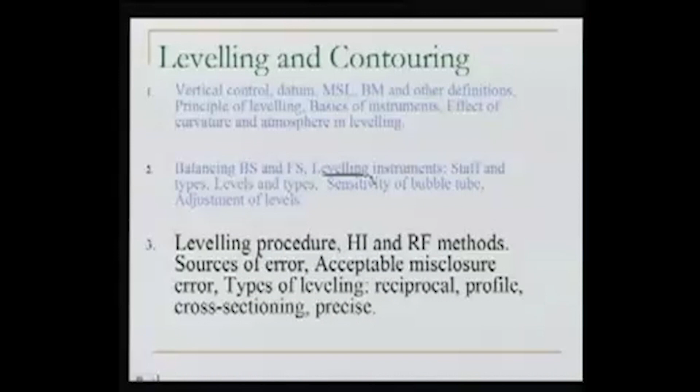What we have done so far, particularly in our last lecture, we understood the terms backsight and foresight, and why do we balance them. Then we also looked into the various leveling instruments, and we had a demonstration with the instrument also. We looked into some more things, for example the sensitivity of the bubble tube, and if there is some problem with the level, meaning we see collimation error or non-parallelism error, how to adjust that while physically working with the instrument. Though we know by balancing backsight and foresight, we can eliminate the resulting error. So this is all what we have seen.

What we will do today: we will be looking into the actual leveling procedure, which are the height of instrument and rise and fall methods. Then we will be looking into some sources of error, and one important thing, that is acceptable misclosure error. Finally, what are the types of leveling - reciprocal, profile, cross-sectioning, and precise. These different kinds of things we will see today.

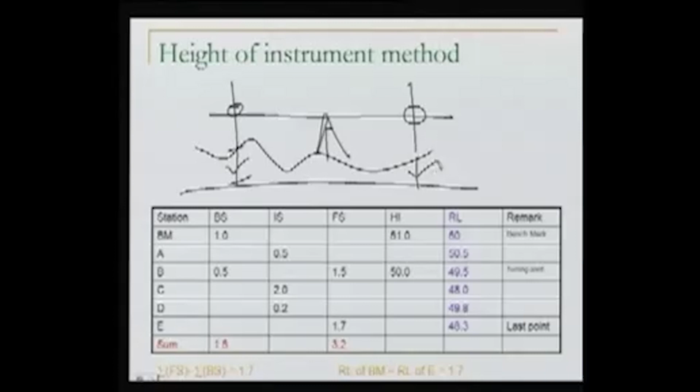So we will start with our leveling procedures. Leveling procedures means how actually we perform the leveling in the field. What we have understood so far is, well, if there is some ground, we keep our level set up at some points, and by making a horizontal line of sight - because we can only make a horizontal line of sight, not exactly horizontal because that is affected by refraction - using this horizontal line of sight for a small area, we can say horizontal, we determine the readings RA and RB. Then if I know the RL of this point, I can compute the RL of this other point. So this is what we have understood.

But how actually do we implement this in the field? This is important, so this is what we are going to do now. This is the field here. Now if you look at the slide, we have a point called benchmark - benchmark means we know the RL of this point. Then there are some more points in the ground: A, B, C, D, E. The job is we want to start from a known point for which the RL is known. The units here are in meters, for example, and our job is to determine the RL of A, B, C, D, and E. So how actually should we do this exercise?

While I am going through this exercise here, please don't bother about this table right now. While we explain the exercise, we will come back to the table also. Now the very first thing, in order to begin the exercise, because this is our area - the terrain which we need to level, we need to find the levels of A, B, C, D, E - we will take a decision: where should I keep my level? And while we are taking this decision, I know by keeping my level here, I should be able to balance my sights. If I am taking the backsight here and the foresight here, they should be nearly equal. So this is the decision which I have to take.

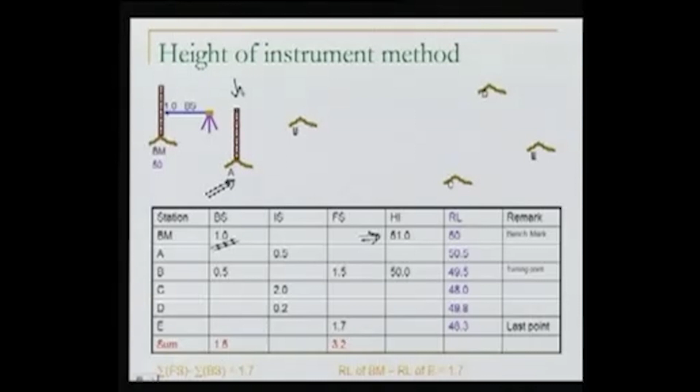The same staff can go here now, so I am keeping this staff here. I am keeping these readings as such because it will help us understand this in total. Otherwise in the field, the staff from the benchmark will move to point A.

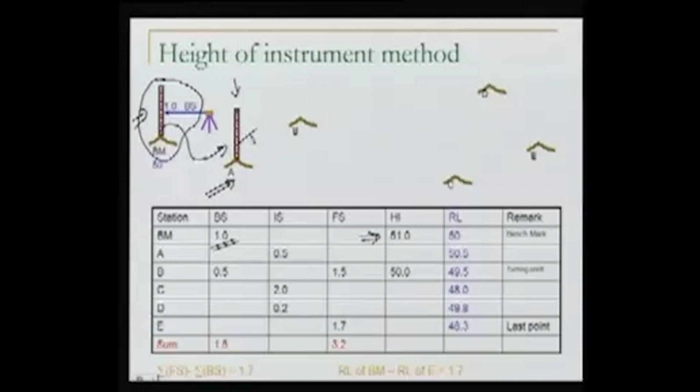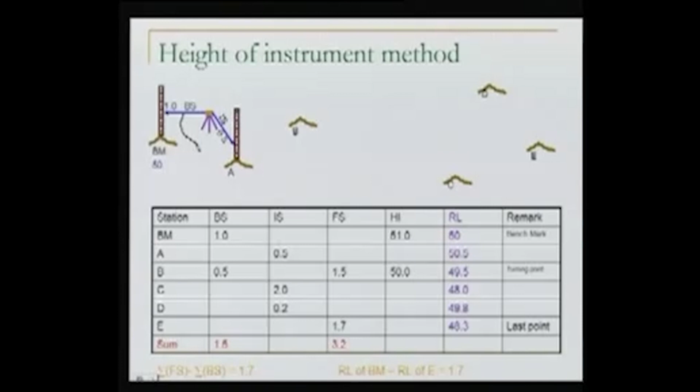Now, having kept this staff at A vertically, we will take the reading. What I have done in this case, this line doesn't seem to be horizontal, but it doesn't matter. I just rotated my level in a horizontal plane, and we know that once we rotate the level in a horizontal plane, the line of sight will still be horizontal. So right now I am bisecting the staff at A, and still my line of sight is horizontal, and I take one observation here, and this observation is 0.5. I read 0.5 here.

We'll explain in a moment, because we already know the meaning of foresight and backsight. We take the backsight to a point for which we know the RL. We take the foresight to a point where we want to end our one particular link of the loop. Intermediate sight is any intermediate point in between, where we don't want to shift our instrument level. What I'm doing is taking an intermediate sight. It's not a foresight yet because I'm not shifting my instrument after taking this sight.

So we take this intermediate sight, and this intermediate sight is 0.5, and now you can calculate very well what will be the RL of point A, because we know the height of the instrument, which is 51. So from this 51, I will subtract 0.5, which I am reading there, and that gives me the RL of A. So the RL of A will be 51 minus 0.5, which is 50.5.

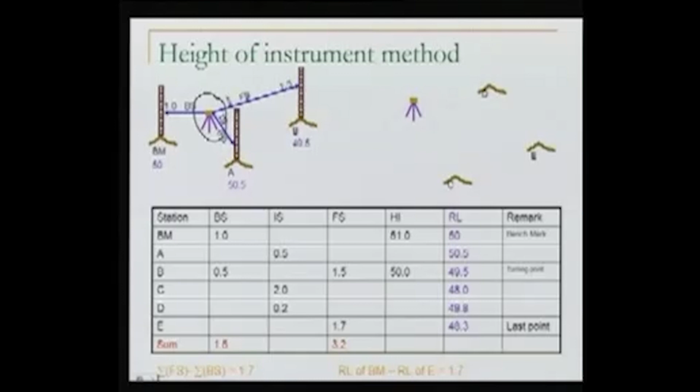So what we would like to do is rather change the level. So this level or instrument is being shifted to some suitable location. We just found a suitable location and shifted it here. Having done it, I again set the level, meaning I again make the line of sight horizontal here.

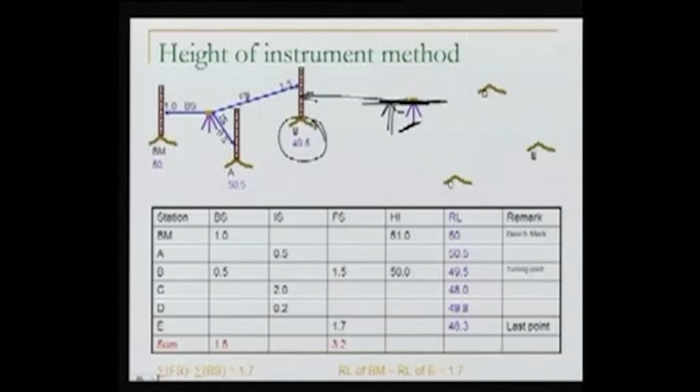Now, do we know the height of the instrument at this stage? No, because we have changed the level and the height of the instrument will change now. So our first job will be to determine the height of the instrument in this location. To do that, we'll take a back sight on this point, because for this point we know the RL. This is what we are trying to do now. We will take a back sight. Okay, we have taken a back sight here.

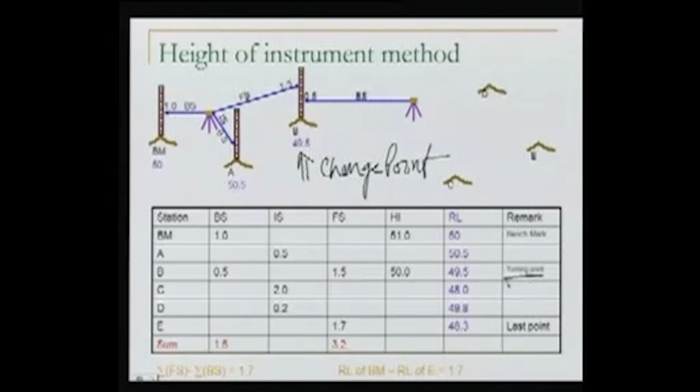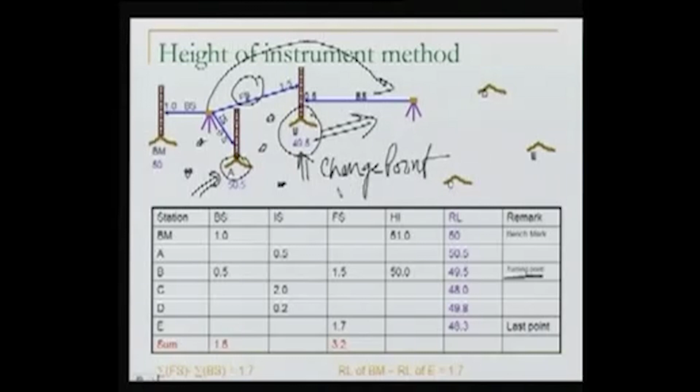One more thing now at this point which is important: this point B we call a turning point or change point. As I have also written here, turning point, also called change point, because this is where we are changing our level. At a turning point or change point, the sight taken is the foresight. While for A, it is not a turning point, because A is just an intermediate sight. There could be many more intermediate sights anywhere, but this is the point which we are using for further transfer of level. This is why this is called change point, and this is foresight, and again we are taking a sight on this, the back sight.

Once we have taken the back sight, we know the height of the instrument. Height of instrument is RL plus this value. So our next height of instrument will be computed, because in our table we'll write this back sight on B. Please mind it, the back sight on B, and once we have done it, we know the RL of B also. So RL of B plus back sight on B will give me the height of the instrument. So we know the height of the instrument now here.

Once we have determined this height of the instrument, we'll try to make use of that in order to determine the other elevations. For example, for C, what we will do is take a sight at C. Let us say the reading here is 2 meters. If it is 2 meters, we know the height of the instrument for C. So I am writing for C the intermediate sight. We know the height of the instrument, so we can compute the RL of C. So RL of C is known.

Then for the next point, D, let us again take one more intermediate sight at D, and this value is 0.2. Now this is intermediate sight, 0.2. So using this height of the instrument, you can again find the RL of D.

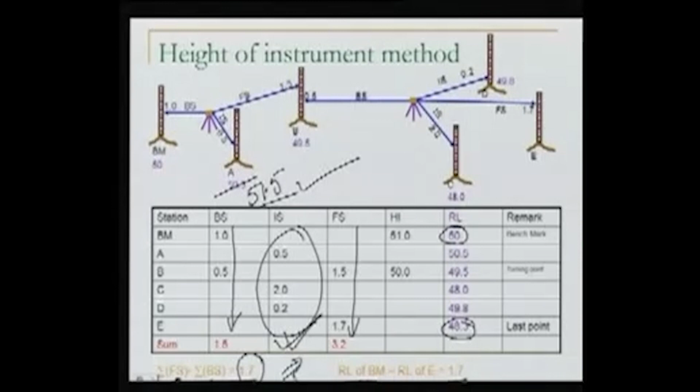Now one thing you will observe: while doing this check, we only include foresight and back sight - we didn't include the intermediate sight. If by mistake some intermediate sight was wrongly computed - say instead of 50.5 I write 51.5 - we don't have a check for this in this particular check. Anyway, we'll see how we can apply a check for that later on.

So this is the method of height of instrument, used to take observations in the field, do the computation, and finally record it. Now we will see the next method of taking observations in the field, how we record it and compute it. This method is called the rise and fall method.

Basically, we are comparing a point which we have just observed and a point we are observing now - what is their relative elevation? Is the new point going up or going down? That's the basic philosophy of this table. Please don't worry about all these readings here yet, because we will go through them one by one and do the computations.

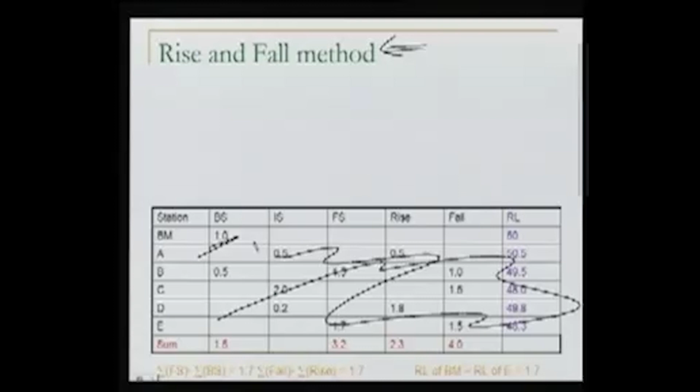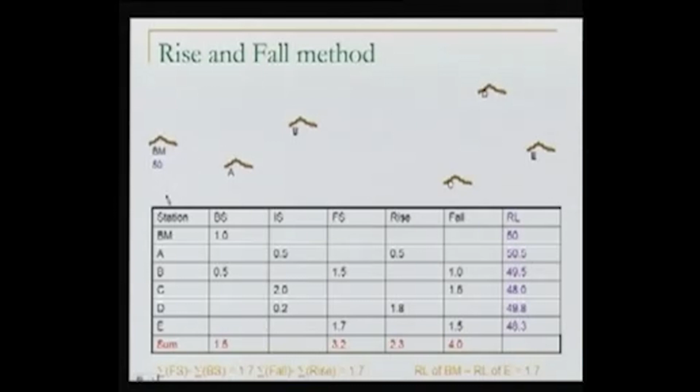Now in this table, we write our stations as before: back sight, intermediate sight, foresight, and instead of height of instrument, we write rise and fall, and finally the reduced level. I haven't included the final remarks column yet, but it will be here. Our terrain is the same one we just did, and for that terrain we want to determine the RLs of A, B, C, D, E using the rise and fall method. The procedure is the same - we'll keep our level here. The job we are doing in the field is not different; it's the same job. The only difference is how we are recording it.

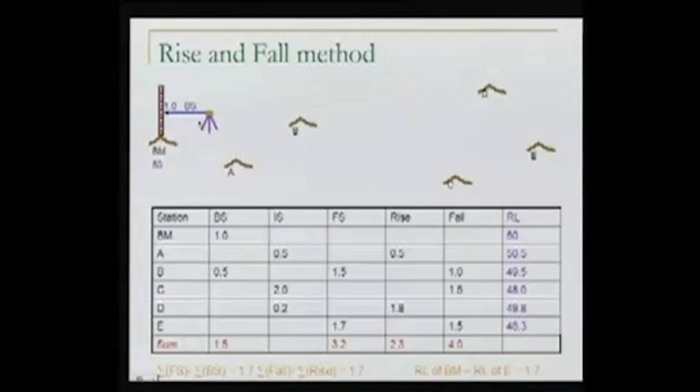We keep our level, keep our staff, and take our back sight. Having done this back sight, I will record it here, as well as record that this point is the benchmark, so its RL is 50. Next, I take my staff to A and take an intermediate sight on it. Now, if the back sight is 1.0 and the intermediate sight is 0.5, what is the relative RL of these two points, the benchmark and A? What is the relative difference between them? The important thing here is we are trying to compare the relative heights of the points. We have taken a back sight at the benchmark, and now we are taking an intermediate sight at point A.

By establishing this horizontal plane and using these two readings, we can very well say whether point A is higher or lower than the benchmark, and also how much higher or how much lower. So this is what we are seeing here.

If you see here, the benchmark reading was 1.0, intermediate sight is 0.5. You can guess very well that point A is higher than the benchmark by half a meter. So this is a case like this.

If our benchmark is here and over here is A, this is where our instrument is. I am taking the observations like this: this is 1 meter total, and this is only half a meter. So obviously A is higher than the benchmark.

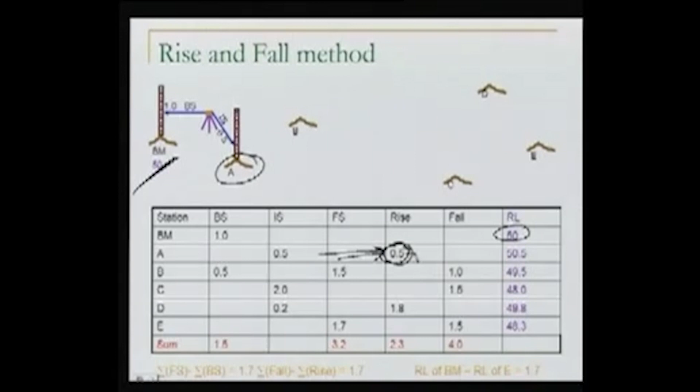So this is how I know that A is higher. So A has a rise of 0.5. Next, I know the RL of the benchmark, and I know that A is rising up from the benchmark by 0.5, so I can compute the RL of A also, which will be 50 plus 0.5, so this is 50.5.

Having done that, next, because we want to determine the RL of B, we will again take a foresight as we have done earlier, and the foresight in this case is 1.5. So the moment I write the foresight here, I am comparing this foresight, or the RL of B, with the RL of A.

So if I compare the RL of B with the RL of A by making use of these two observations, you can very well say that B is falling down by 1 meter from A, because B is 1.5 meter, A is 0.5 meter. So B is falling down.

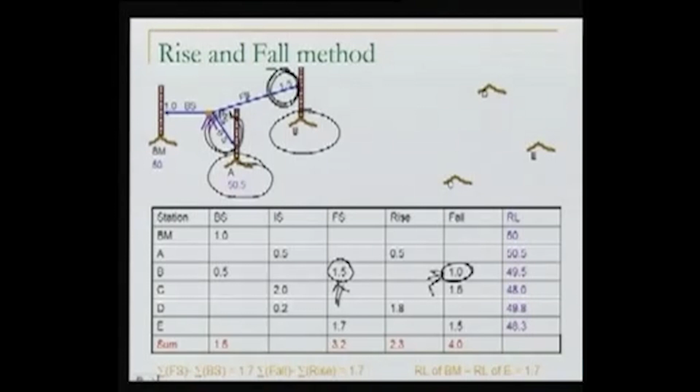Okay, so we write this, a fall at B of this value. If this is so, what I can do is subtract this fall from the RL of A so that I know the RL of B now. So the RL of B can be computed.

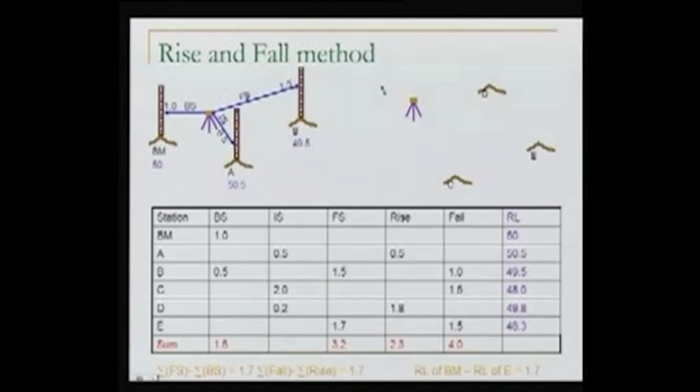Let us do it. RL of B is computed. Next, we change our instrument, we take it here, and we take a backsight, because in order to know the RLs of these areas, I need to connect my survey with the previous survey. So I take a backsight.

Now the backsight is 0.5. Okay, the backsight I write here, 0.5. Next, I take my sight to C and take the intermediate sight here. So again at this point I can now compare, because I already know the RL of B.

I can compare by taking this backsight and this intermediate sight, whether C is higher or lower than B. Because the reading is more, C is definitely lower. So C has a fall of 1.5 meter from B. So C is lower by 1.5 meter from B.

What I can do now, since we already knew the RL of B, I can find the RL of C. So this minus the fall is the RL of C. Having done that, we can go similarly for the D point and as well as finally the point E. So what we are doing is just comparing these RLs here, and finally we will write all these observations.

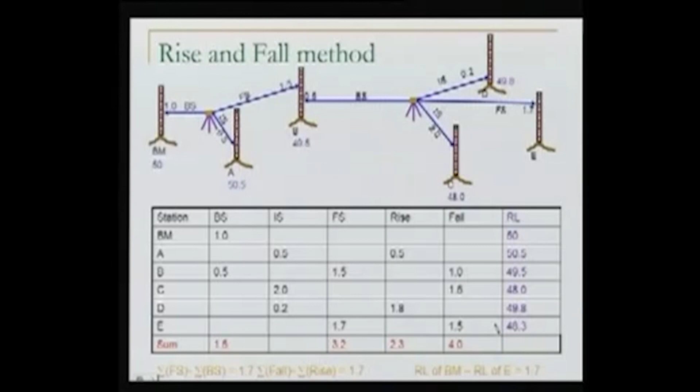Now in this case, as we will see in a moment, we can apply some extra checks. What these checks are, we'll see now in the slide. Well, the very first check is RL of first point minus RL of last point is 1.7. Well, we have already done sigma of foresight minus sigma of backsight, this is 1.7. We have done it already.

One more check that we can do, because we are either rising up or falling down, is the sum of rise and sum of fall. If you find the difference of these two, that should be the same as how much the first point is higher or lower than the last point. So this is what we are doing here. We find sum of rise, sum of fall, and find their difference.

This difference also comes out to be 1.7. So what we have done, unlike the previous method, the height of instrument method, is also include the intermediate sights in how rise and fall are computed. So we are applying this check to the intermediate sights also. If any of the intermediate sight computation is done wrongly, we can catch it here now.

So in that respect, this is a better method.

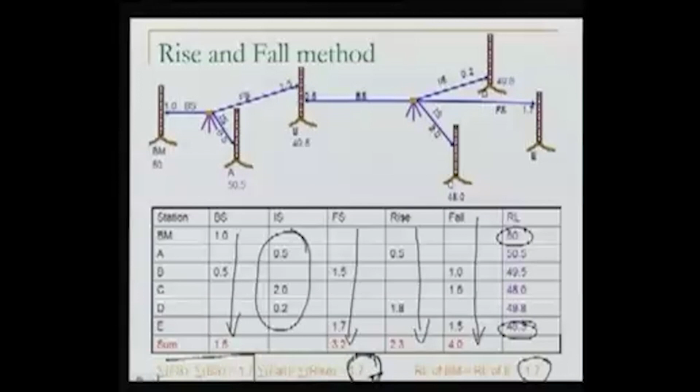Finally, one more kind of error, that is natural error, meaning the error due to natural sources. The very first one could be the error due to curvature of earth, or maybe refraction. We have seen this, how does it affect? The second could be, we observe it, there could be...

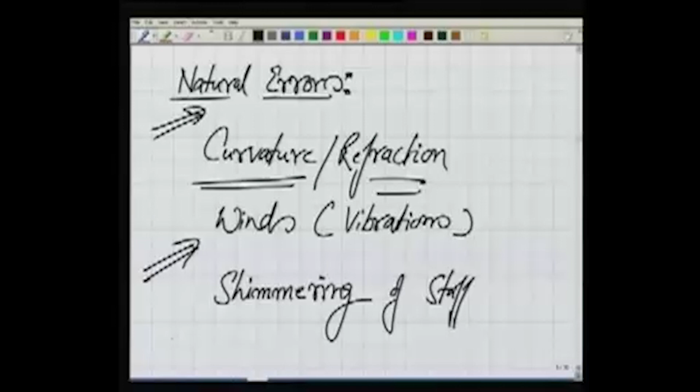Winds. Winds means, if there is heavy wind in the field, it is very difficult to keep the staff vertical. Number one. Number two, sometimes your instrument may have some vibrations. Because of that, there will be a problem.

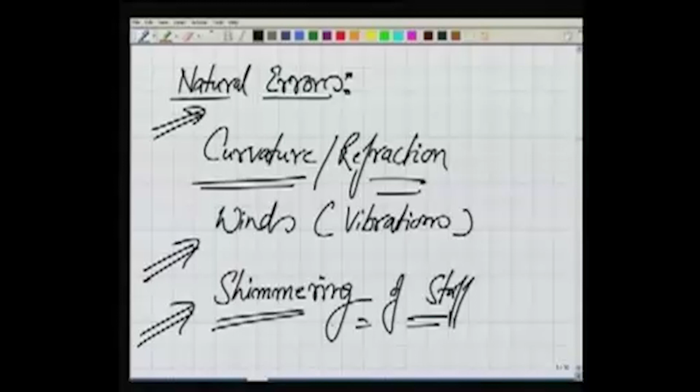Then finally the third one, and you can experience this only if you are looking through the telescope. Please do that. Look through the telescope at a staff kept 100 or 150 meters far away. What you will observe, particularly during summers, because of different layers in the atmosphere and their relative movement, the image of the staff appears as if it is shimmering. So it becomes very difficult to bisect a point there if the staff is shimmering, and this leads to some error.

Now we have seen all these different kinds of errors which may occur in leveling, but we saw only a few of those. There may be various other sources, and you will experience more of that when you are in the field.

Now what we will do is talk about the types of leveling. What is the meaning of types of leveling? It means, we have seen the simple way leveling can be done, but actually some categories are there, and we would specifically like to name them, and discuss how we do leveling in those categories. This is what we are going to discuss now.

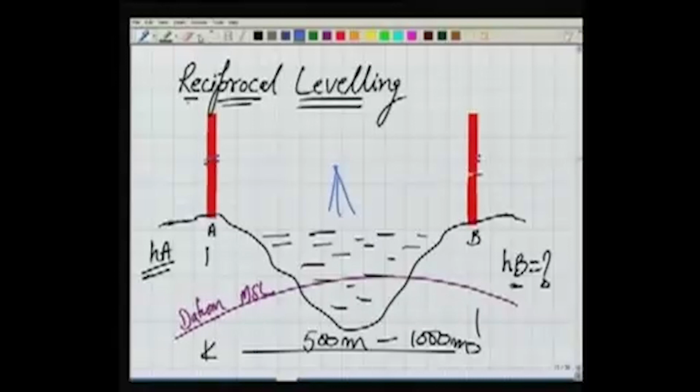So we can't keep our level here in between. So what to do in that case? We can't keep our level here. If I keep my level only on one side, like this, and take the observation...

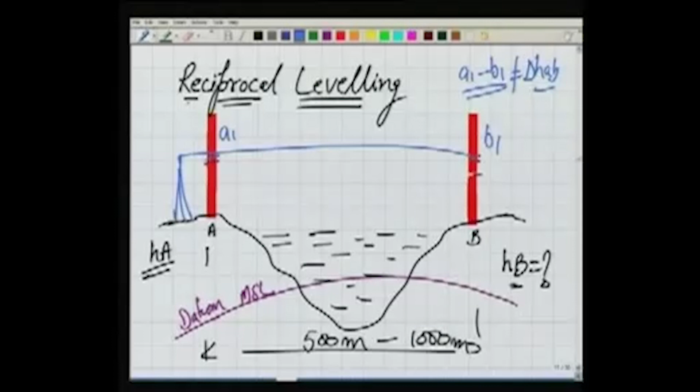Somewhere here I read, if I take observation A1 and here B1, A1 minus B1 will not give me delta HAB, the difference in elevation between A and B. It will not give me that because of the errors. We know that already. Now how to eliminate that?

Well, what we do in this case, first I would like to keep my level here and take the reading at staff A, which is A1, and take the reading at staff at B, which is B1. I take these two readings. Then next...

Our desire is, as we know, that the surface along which I am taking the observation, this violet one, should be parallel to the mean sea level or our datum. This is what our desire is. But this is not the case. We know it, we try to make the line of sight horizontal, still it is not horizontal, slightly in some curve. So basically we are observing along this blue line B1. Ideally I should have seen at C1, because this violet line is parallel to our datum.

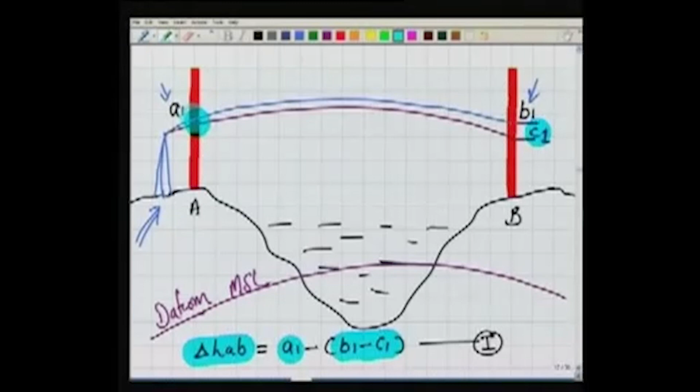So this C1 is the amount of error. Now how can I write it? The delta HAB will be A1 minus B1 minus C1, because B1 minus C1, what we are doing is applying the correction at B1. We are not applying any correction at A1, because the staff here is very near to the leveling instrument, and the effect of error due to non-parallelism, collimation error, curvature, refraction, all this will be very insignificant, negligible. That's why we are not applying any correction at A1. So this is how I can write it.

But in order to find the answer, I should know the value of C1. What is C1? How to compute it? Either we compute it and then apply the corrections and find this delta HAB, and then using that we can find the RL of B. But applying correction means I should know about the atmosphere in between. What is the kind of atmosphere here? In between, I should know that. If that is not the case, what we can do, keep in mind we have taken this observation, and I am writing this as equation 1 here.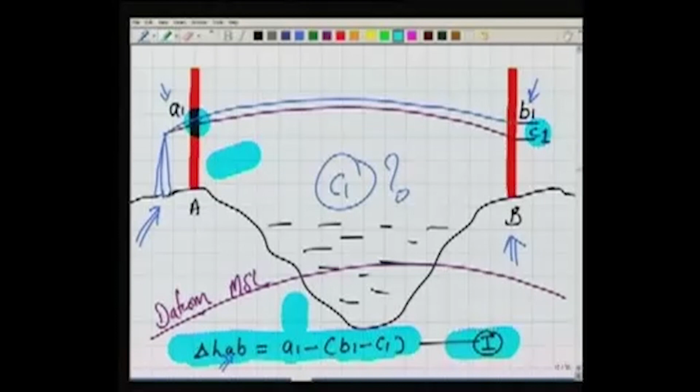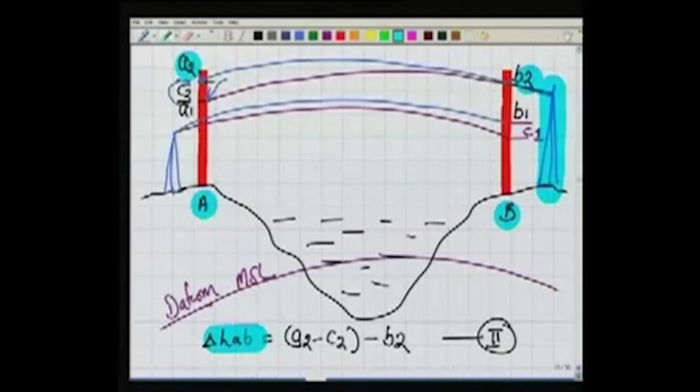Then second, we shift the instrument here, take again a B2 observation here and A2 here. Again in A2, the bisection should have been at this point, I should have seen this, I should have read it. But because of the error, I am not reading this, rather I am reading somewhere here at A2. So I should apply in A2 the correction which is equal to C2. What we are doing here, the difference in elevation between A and B, delta HAB, for this case is A2 minus C2, because whatever I am reading at A2, I am applying correction to that, minus B2. No correction at B2 because the staff at B is very near to the instrument.

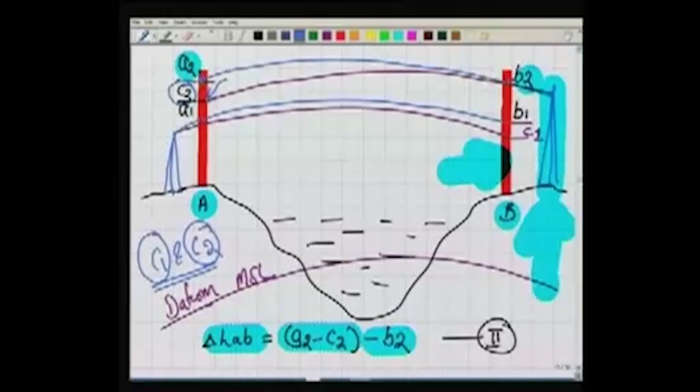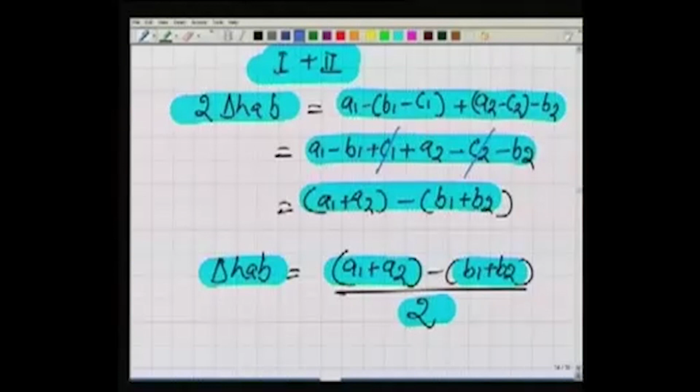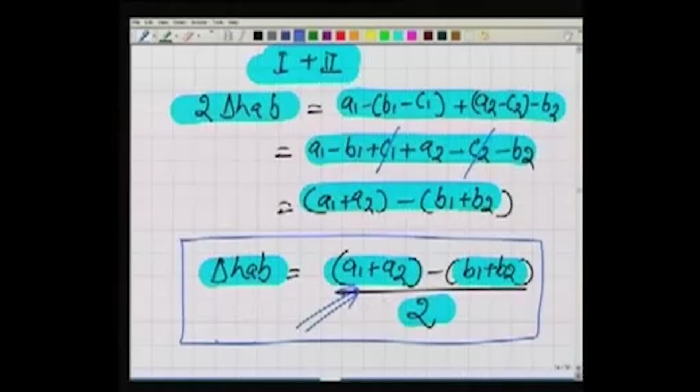One thing is very important here: how about the values of C1 and C2? If we are taking these observations simultaneously, meaning I have one level kept at A, another level kept at B, and we are taking the observations simultaneously, so that the atmospheric condition for both these observations is the same. In that case, we can say that C1 should be equal to C2, these two errors should be same. So if these two errors are same, I can sum equation 1 and 2. So 2 delta HAB, if you sum them up and simplify, we find delta HAB is A1 plus A2 minus B1 plus B2, because we have already discussed that C1 and C2 will cancel out. So we can still determine the difference in elevation between these two points by taking the observations A1, A2, B1, B2, meaning the observations from 2 ends simultaneously.

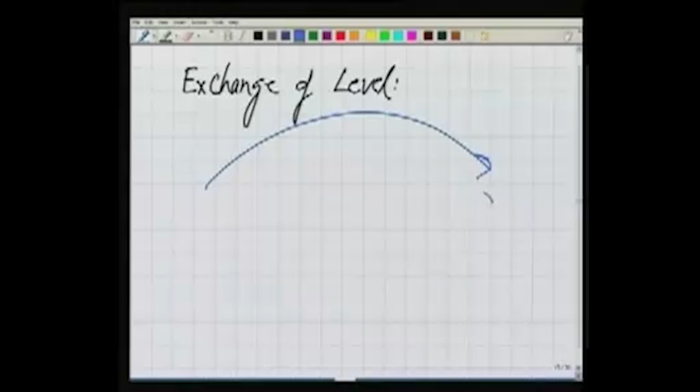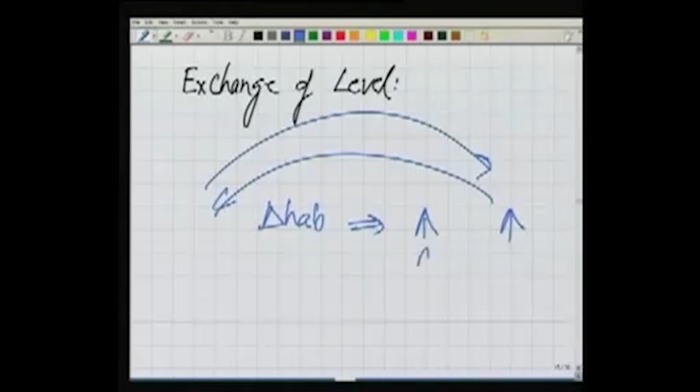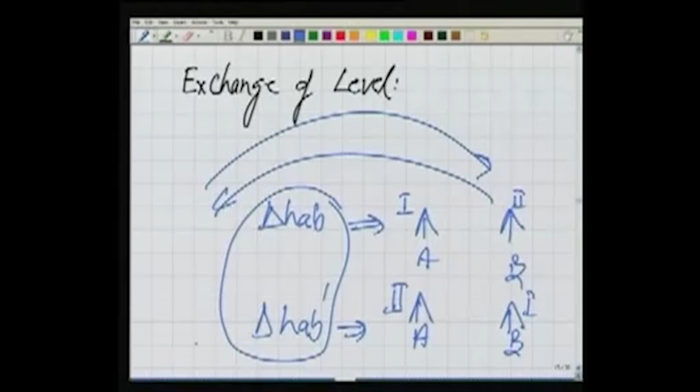Now what if our levels, level 1 at A, level 2 at B, have different collimation errors, what should we do? We would like to exchange the levels also and repeat it, because we found, for example, delta HAB when the levels were like this, point A, point B, this is level 1 and level 2, this is how we had done it. We find again delta HAB dash for the condition that at A the level is now the second one, we are exchanging them, and at B the level is now 1, and we will find the average of these two values. So this is how we can also eliminate the error which may occur because of the non-parallelism of these two levels. So this method of leveling across a wide river or ravine is the reciprocal leveling.

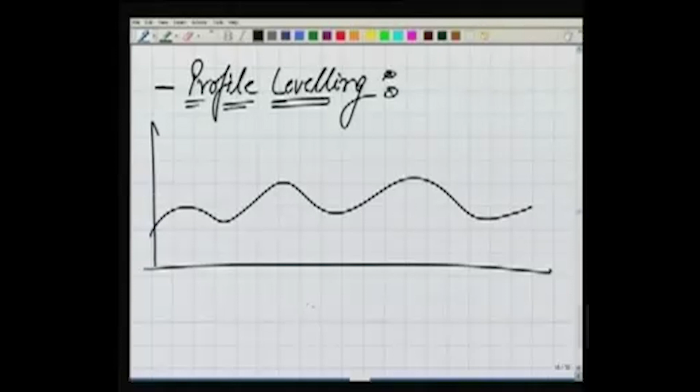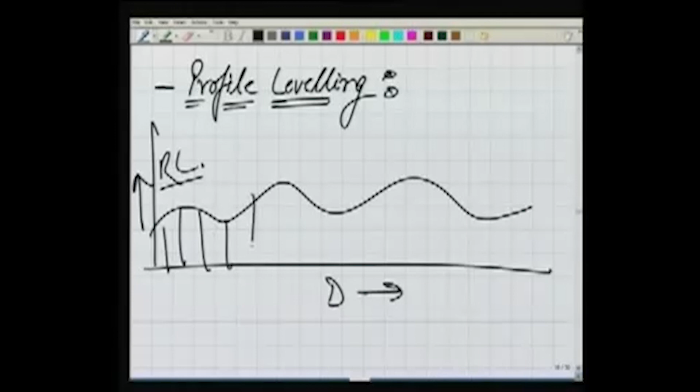Now the next method of leveling is profile leveling. These are very simple things, more about these you can read in any textbook, but just to understand what these are. Profile leveling means if you have a ground and you want to create a profile of this. Profile means for a ground along a distance D, you want to know how the RL is varying. This is the profile. A typical profile may look like this, how the RL is varying. This profile is very important in many applications. If you are going to lay a road in that particular terrain, you would like to know the formation level for the road should be such that the amount of cutting, this is cutting, all blue shaded is cutting, should be equal to amount of filling, all this red shaded is filling.

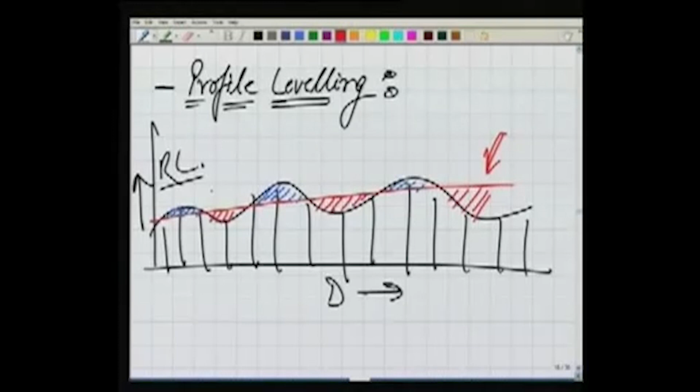For an optimum solution, the amount of cutting and amount of filling should be the same. How do we know that? We have to construct a road, and before constructing it, we want to fix the formation level of the road at a certain gradient, ensuring the amount of filling and amount of cutting are equal. This answer we'll get only if we can do a profile along the road. So how do we do that?

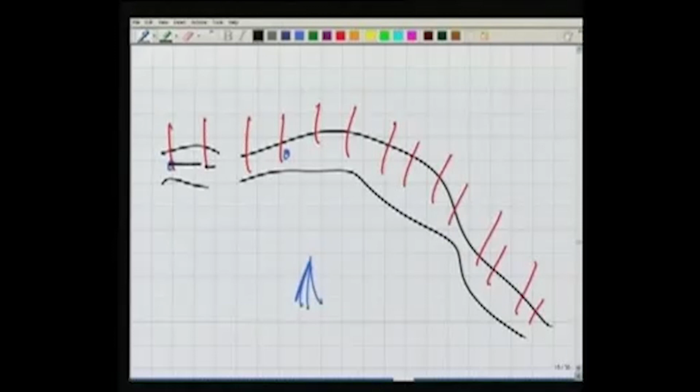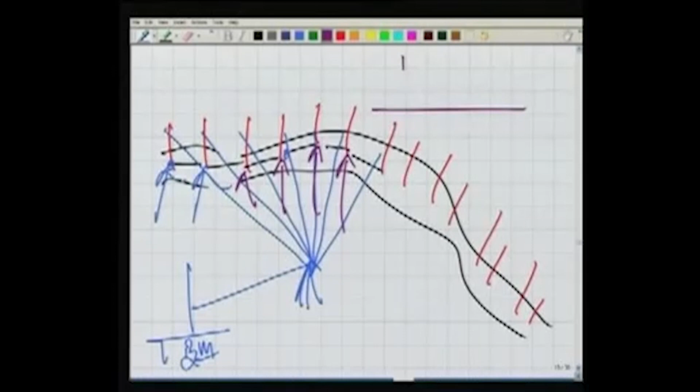For the road that is going to be constructed here, what we will do is take various points. I keep my level here, and by keeping my staff at various places, I measure all these distances. At the same time, I am also taking sights to all these staffs. By doing this, and also taking a sight to a benchmark here, I can determine the RLs of all these points. So if I know the RL of all these points, and I also know the distance along the line, I can plot this profile, and we can use this profile for our application.

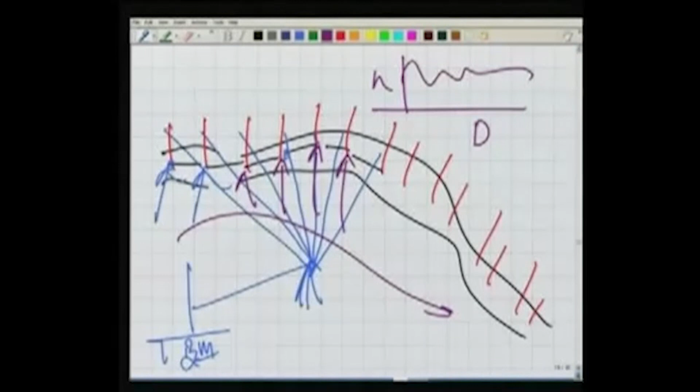Well, the second method, which is similar to this one, is called cross sectioning. What is it?

In the case of the profile, we do it if we are interested only in a very narrow strip. But if we are interested in a wider strip, like a big highway with 6, 4, or 8 lanes, we are interested not only in one line but in a broad area. So our aim is, if this is the area for which I want to know the topography, we would like to carry out a profile. How do we do the profile?

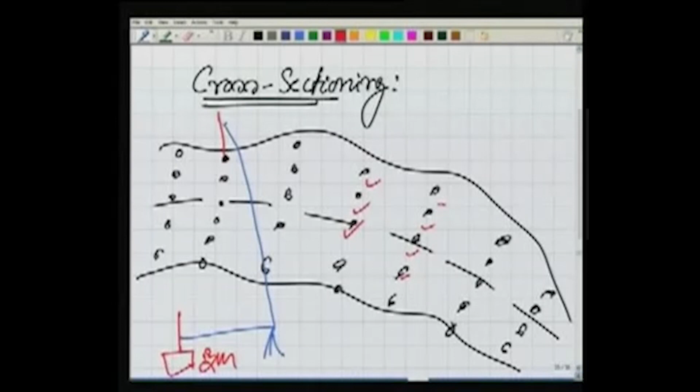If I keep my level here, I would like to have an arrangement of points. Let's say the points are arranged such that these are the points for which I want to determine the RL. For all these points, our desire is to determine their RLs. So what we will do is, at any of these points, I keep my staff and take a sight to it, while I have already bisected a staff kept at a benchmark. Using this, I can determine the RL of all these points. So by this method, we get a carpet of points, not just a single line, but a carpet of points covering a wide area. Using this, we can compute volumes of earthwork, the amount of filling and cutting, more accurately.

One more type of leveling is precise leveling. Precise leveling means using the staff we looked at in our last lecture, where the least count is 1 centimeter or half a centimeter. This kind of staff, or that kind of leveling with that precision, is not suitable in some applications.

For example, you are interested in laying down the production line in an industry where various instruments are kept along the production line. The center line of those instruments has to match very well with the levels of the foundations. These have to be done very accurately. Similarly, you may be interested in seeing the deflection of a bridge or a dam. Again, you look for something very precise, a more accurate leveling system. This is where we use precise leveling.

In precise leveling, we especially make use of a staff graduated in millimeters. When we bisect the staff using the telescope of our level, similar to a simple auto level, we bisect it by making the line of sight horizontal. So, for example, we are bisecting it here. We can read the reading as 105 plus something more. How much is this something? We could guess it, but we don't want to guess here because we want to measure it precisely, since it's precision leveling.

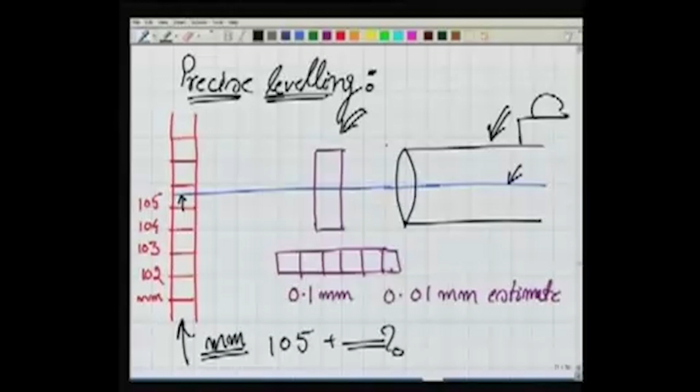How is it done? This is realized by one more instrument which is fitted in front of the objective lens, and this instrument is called the parallel plate micrometer. Now this is here. What does it do?

Right now we are looking at this. If I rotate this parallel plate micrometer, it will bring this line of sight down, so that I can bisect the lower full value.

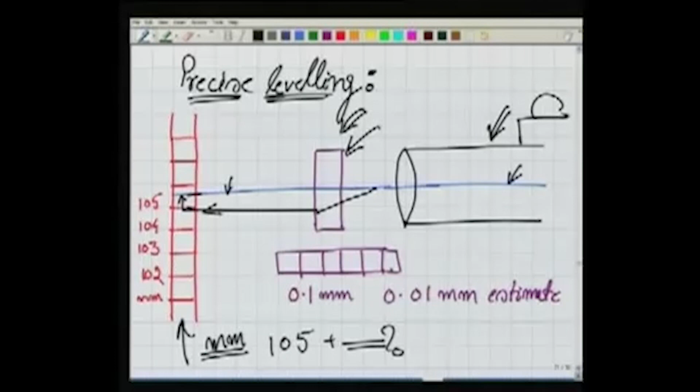So the lower full value here is 105. While I am rotating this parallel plate micrometer, we observe how much it has rotated. We need another system where we can measure how much rotation we have given to it.

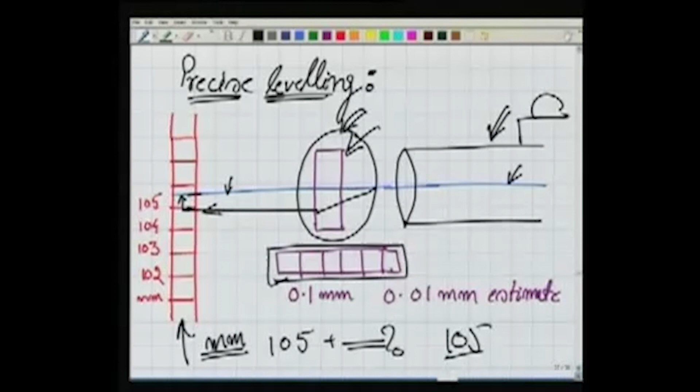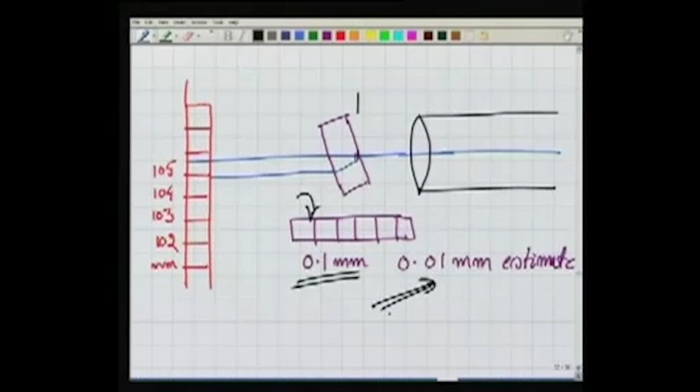Now here is an example. It has been rotated by some amount, and the corresponding value, how much we really rotated it, we take here. Using this, we can measure up to 0.1 millimeter, and then further estimate up to 0.01 millimeter. It depends upon the different micrometers or these precision leveling instruments, what kind of instrument it is, and what final precision it will give you.

Now we have seen the various things in leveling, we have seen the errors also. So in any case, however careful we are, there will be some errors in our observations. Is there any way of checking it? Is there any way of saying whether the observations taken in the field are acceptable or not? How do we do that?

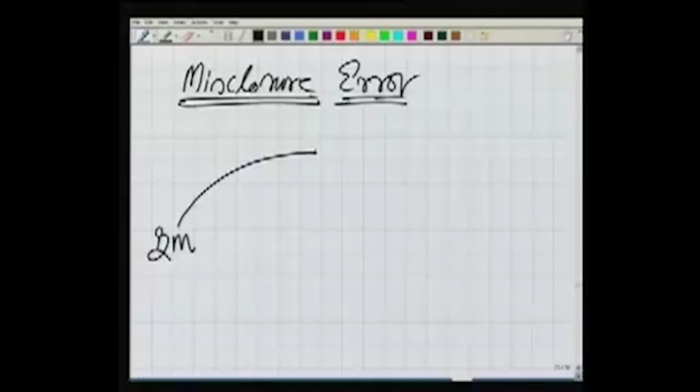I will give you one example. Let us say we start from a point which is a benchmark, and we go to point A, and the difference in elevation between these two is 2 meters.

Then this is what we are observing. The moment I write 2 meters, I mean I have observed the difference in elevation between these 2 points as 2 meters. Next I move to point B and this difference is 3 meters.

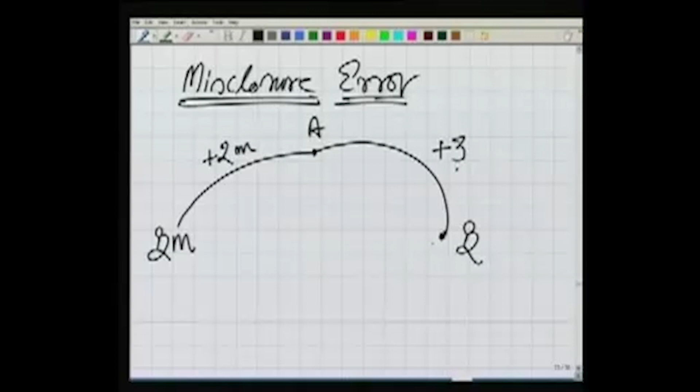Now I am also observing the difference between benchmark and B directly. I can do the leveling along BM to A, then A to B, and also BM to B directly. What I found is that going BM to B directly, the difference in elevation between benchmark and point B is 4.98 meters. What does this indicate?

It indicates that while taking observations through two routes - one through BM to A to B, finding the RL of this point, and second time directly from BM to B, finding the RL of this point - the RL in both cases is coming out different. Is this possible? There in the ground is a single point, it should have one RL, but we are getting two different values through this route and through this route.

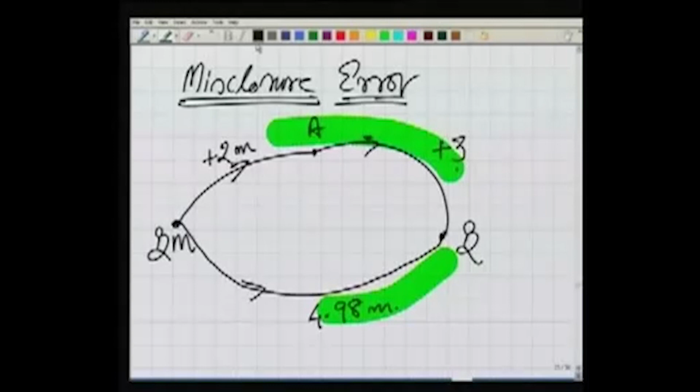It's not possible. What we say is, generally when we do the leveling, we start from the benchmark, go to various stations. Let's say we reach A, we reach B, and from B we finally close back at the benchmark.

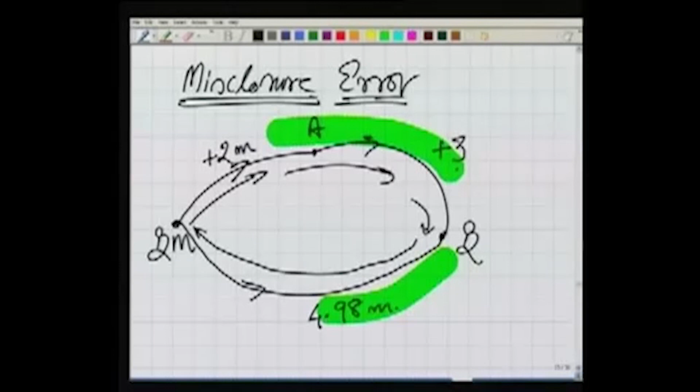If I draw it again, in any leveling, this benchmark is here, and there are various points for which I need to find the leveling, or I need to find the RLs. What I would like to do is go like this in steps, and then close the loop. Now whatever the values here, H1, H2 are the differences in elevations, along with H3, H4, H5 and H6.

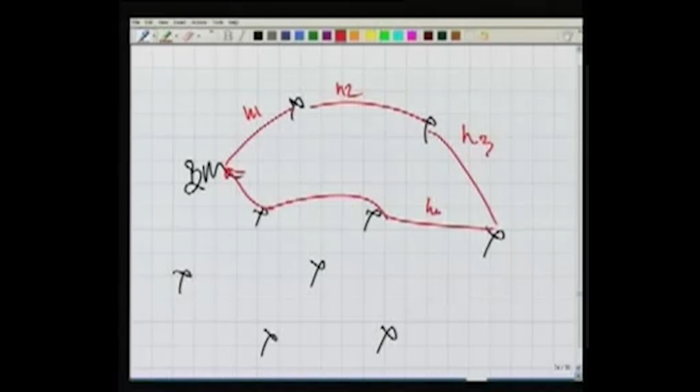So the sum of all these H values should be equal to 0 with the proper sign, because I started from a point, reached the same point, and the difference in elevation should be 0 - the sum of those differences of elevations. But it will not be so.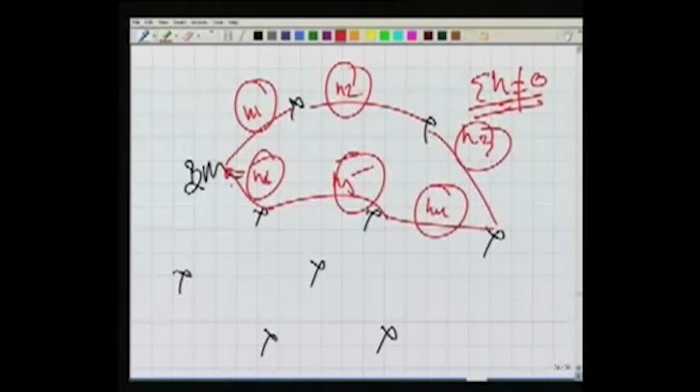We know it will not be so, because in individual observations, all these have some error. So now the question will be, can we really say something about this error, whether it is acceptable or not? We have a way to take this decision. How do we take this decision? We say the acceptable error...

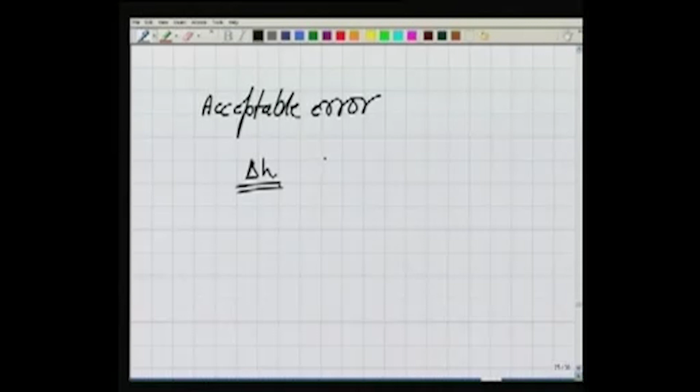should be: if my delta H, let's say this is the closing error, is less than or equal to m times k raised to power half, or also m times n raised to power half. What are these terms?

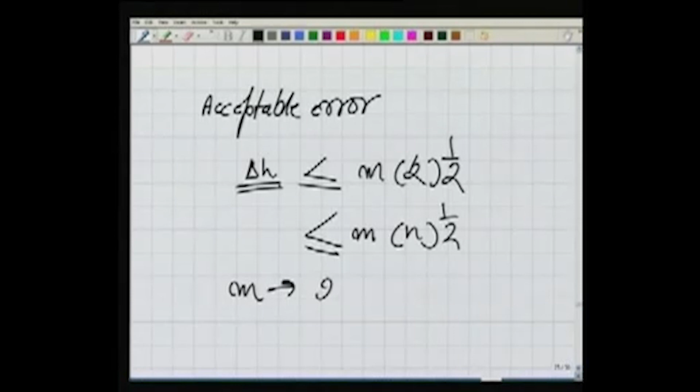Here m can have a value from 2 millimeter to 12 millimeter, depending how precise we are looking for. If you are looking for a very precise survey, our value will be somewhere here. If our survey is not that precise, our value will be here.

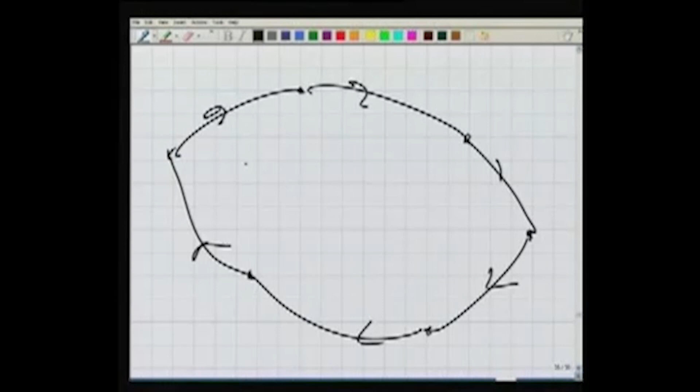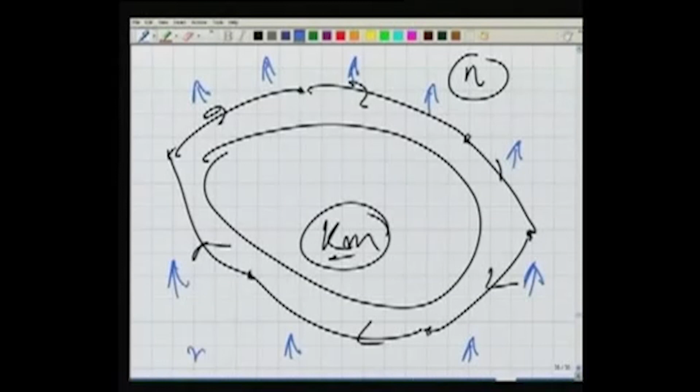Now, what is K and what is N? K is starting from a point, going to another point, and finally closing our level. This is how we have closed the level. What is the total distance in kilometer? That is K in this formula. And N stands for, when we are doing this exercise, I might have kept my instrument in several places. How many settings of the instrument? All these are N. So we can use either the kilometer thing or the N, and we have to use the same throughout our entire project.

So this is what N is, number of settings of the level instrument, because we know, more is the kilometer, more will be the error, because definitely we cannot be true in our observations. We can never get the true value. There will be some error.

Now, if we are doing a very large network, that total error will be more. So this is why it is proportional to K. Similarly, more number of instrument stations means larger is the network, and the more the stations, the more will be the chances of error. So again, it is proportional to N. So by knowing how big my network is, we can take a decision whether my error is acceptable or not.

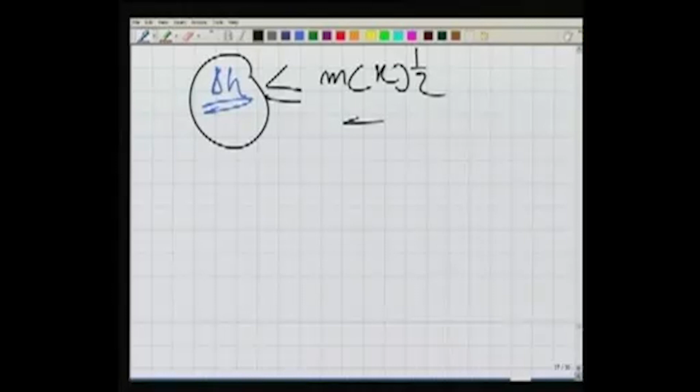Well, the closing error, let's say delta H is the closing error. If it is less than these values, K raised to power half and the other one, we will accept it. Accept means we will say, okay, there is no need to revise the survey, to go to the field again and do the survey.

But what we need to do is close our network, because we are finding the difference in elevation between all these points, and when we find this sigma delta H, the difference, it should be 0. It is not 0, but in theory it should be 0. So what we should do? We should try to adjust our observations. We should apply corrections to our observations in such a way that this becomes 0.

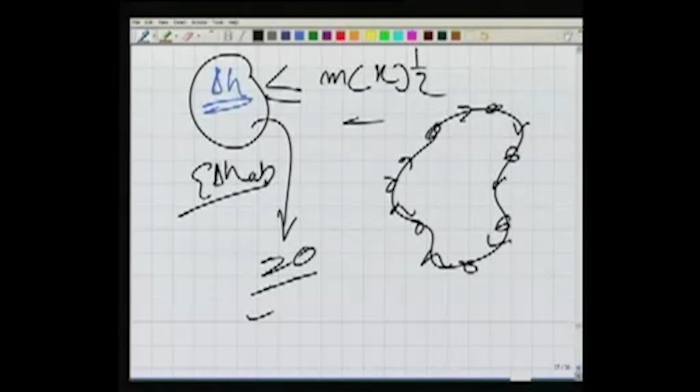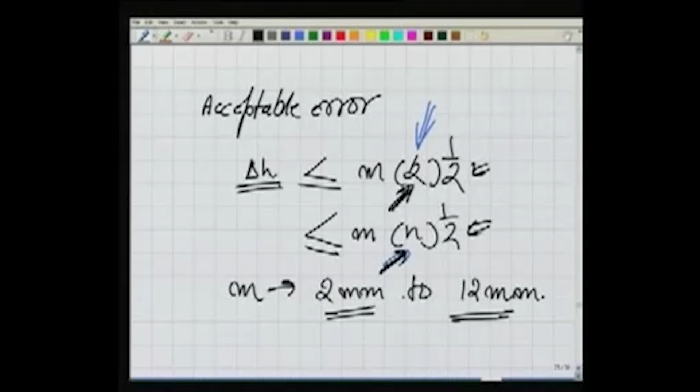Now how do we do it? There is a simple method. As we are distributing the errors, we are finding the acceptable error proportional to the distance in kilometer or proportional to the number of settings. Similarly, we will try to eliminate the error also, or to apply the corrections. Well, what is the way?

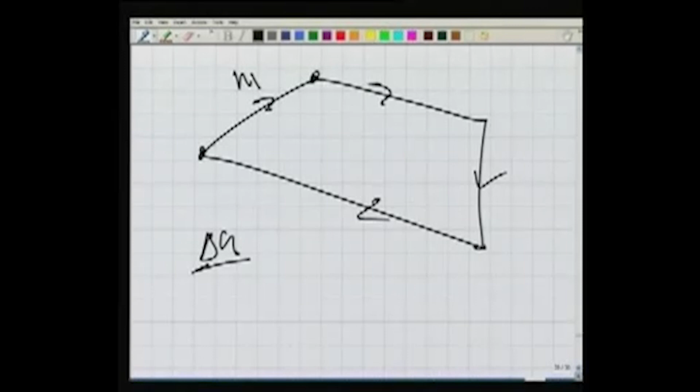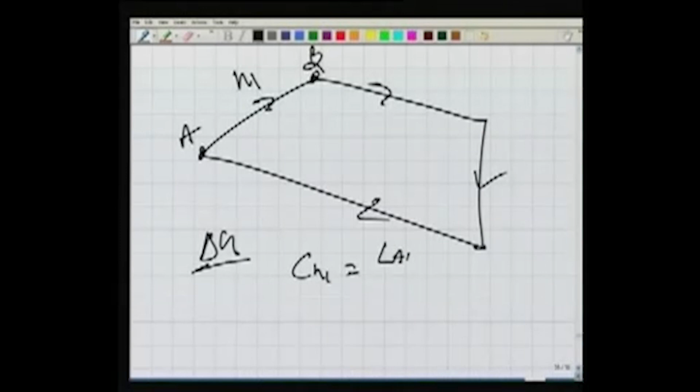In a network like this, if the closing error is delta H, this is H1, the difference in elevation between 2 points is H1. So for this A and B link, the correction in H1 will be: what is the length of AB, divided by what is the total length, the entire perimeter here, multiplied by the closing error. So we can distribute now, we can find the correction and we will apply this correction to H1. Similarly, everywhere H2, H3, H4. So this total error has been now distributed.

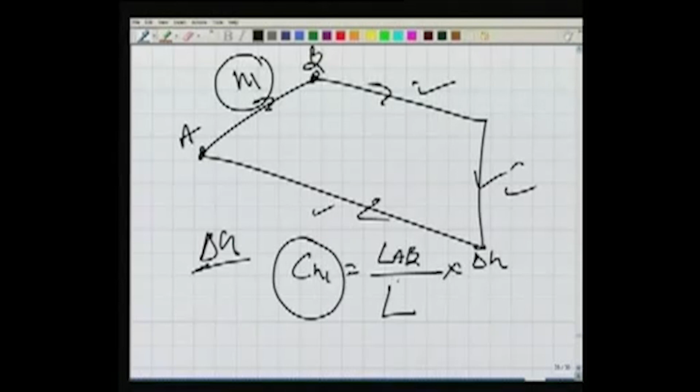We can also do the same thing instead of writing it like this, in terms of how many settings between A and B divided by the total number of settings in my entire network.

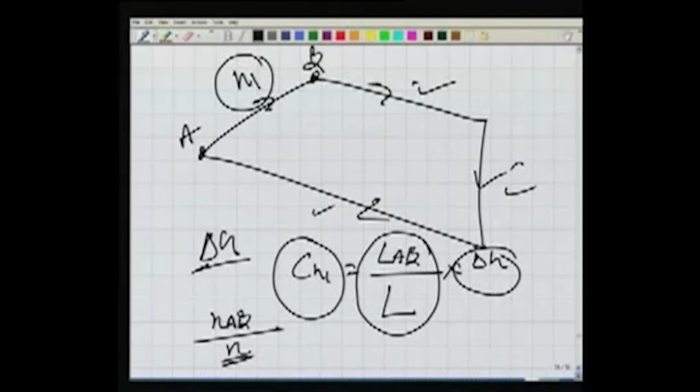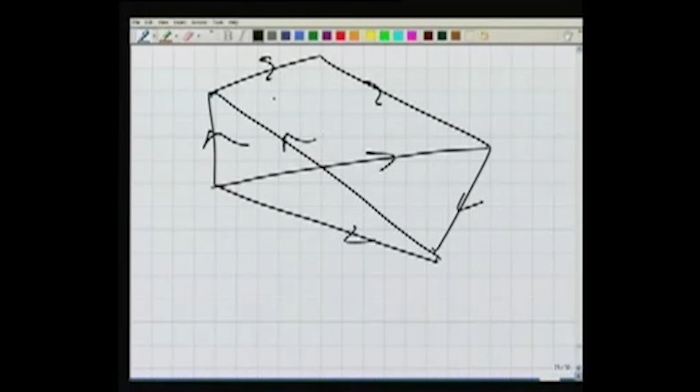Now, as far as our network is a simpler one, just like this closing loop, the job is very easy, we can distribute it. But there may be a case when my network is such that I have taken these lines also. So there is not a single closing loop, there are many closing loops.

My observations should finally satisfy the closing condition in this loop, or maybe in this loop, or also in this loop. All possible loops which are there, they should be closed. So we cannot adjust now by taking only a single loop. Rather, we have to take all these possible conditions which exist in my network and then adjust it.

And this is what we will see later on when we talk about adjustment and computation. So what we did today: we talked about some special types of levelling, reciprocal, profile, cross-sectioning, precise levelling. We also saw how we record the observations in the field book and how we do the computation by these two methods. And finally, we saw the concept of acceptable misclosure error.